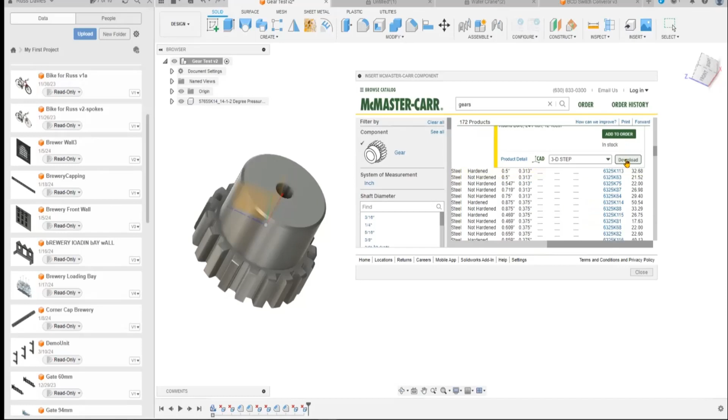Then you can go through and pick the parameters you want. I'll just click one at random to show you, then come down here, and you've got your CAD. Now I use the STEP ones, and they work with Fusion. You download it, and there it is. Let's just switch off my other one a minute - so that's the new one.

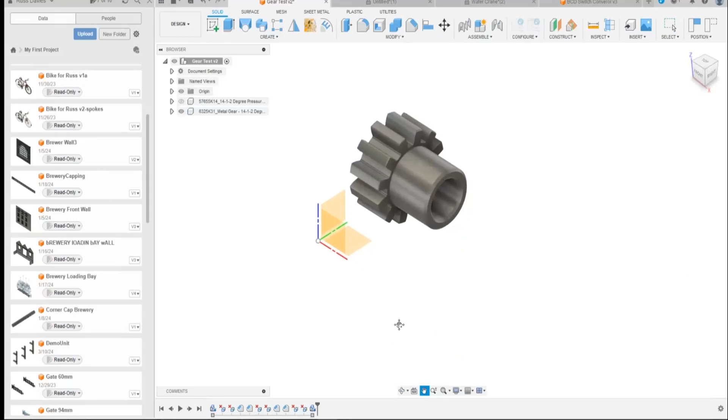We can move it about to where we want it and finalize it. Now, this suited me because it was the right diameter and right number of teeth, but I wanted a different size hole in it. So on the hole, we just highlight it, go into Push/Pull, and now we can see the actual size it is. I want to change that, say to one millimeter. I just type in 1 millimeter, and there's the new hole.

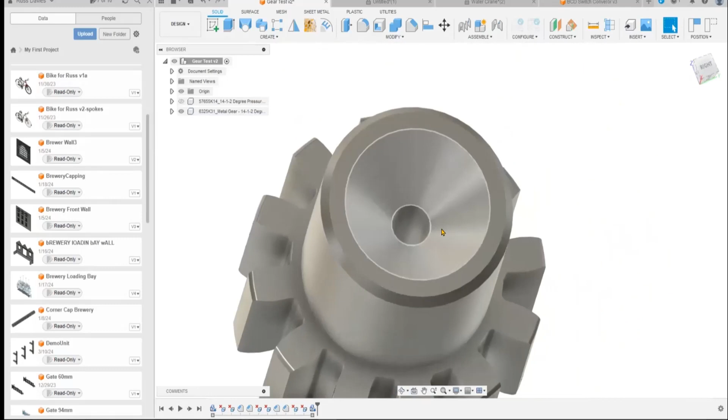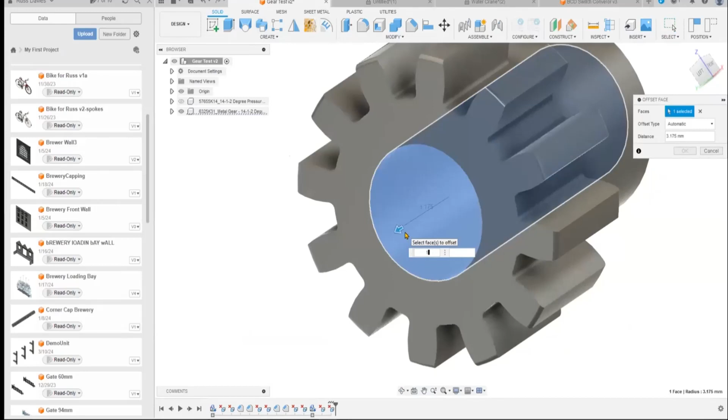Now it's extended this, so if we go back, you can edit. Let's get rid of that - delete it, delete the other one as well on the other side, delete, and then we'll just make our hole with Push/Pull, not Extrude - Extrude doesn't work on curves. Change it to the 1 millimeter we want, then we can come back and put our little chamfers back on.

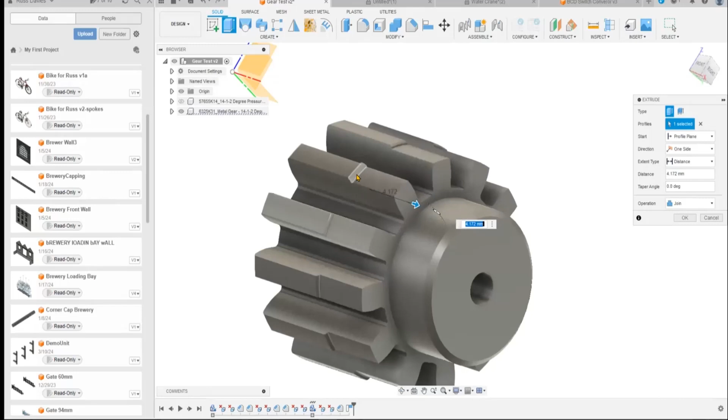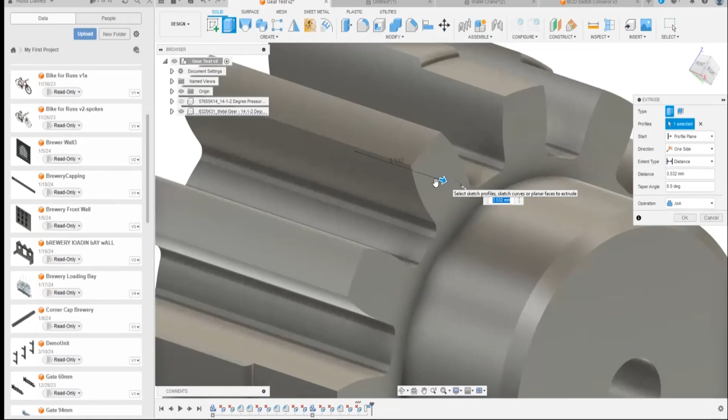And again, we want to make it a bit thicker maybe. We can highlight that edge there and extrude it, capture position, and bring it up there. Now you notice we've got a lip there - what you need to do is remove these curves first, otherwise you're extruding from there, not there. So you just highlight, delete, go around, then highlight it, extrude it, and then you can see, because we've taken them away, it's as easy as that.

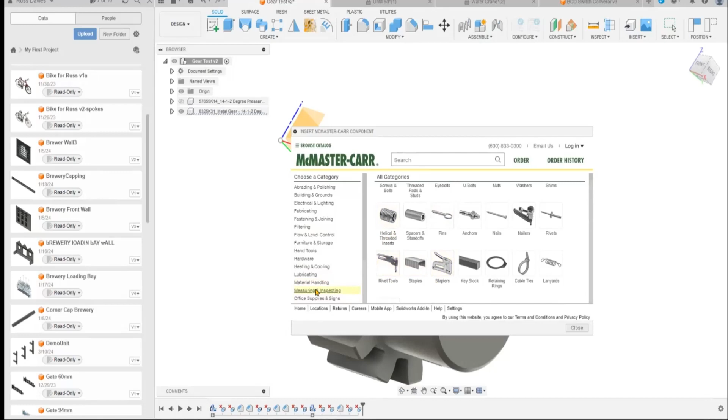Now that McMaster, if you look at it - let me run back to show you - you can see the sort of information you've got here. So you've got nuts and bolts. Not everything has a downloadable file - I don't think you'll find one for a Jubilee clip, for example. But when you're looking at nuts and bolts and these sort of things, it's great. Springs as well can be downloaded, and it can give you a good start, or you can use them as they are.

Can I just ask you a quick question on that? Don't go off that screen a sec, Russ. Sorry, I'm going to throw you under the bus. I apologize. What's that - could you change the diameter on one end of it? So that hole going through, instead of 1 mil all the way through, could you make it a tapered hole? Well, of course you could - now you're going to chuck me in the deep end, did you? Let's have a go, shall we? Let's get a shot of that first, right?

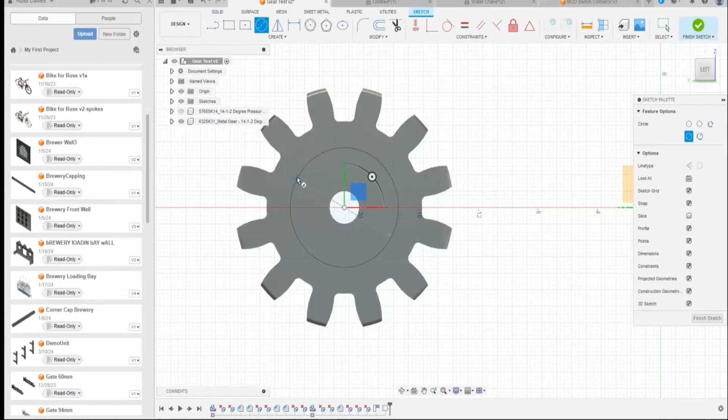So what we're going to do is a sketch on there, and we're going to sketch a hole there, okay, finish the sketch. We're then going to go to the other end, put a sketch on that end - and you know me, I don't like measuring things - so there's the other hole there, okay?

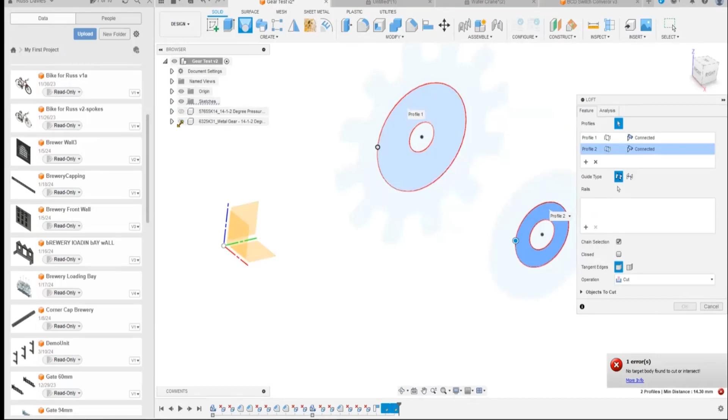Now what we're going to do is switch off the body so we can see what we're doing, and we're going to highlight both ends and do a loft, from there to there. We go down, we want to cut it, switch back on the body that we had - I think it's that one - and there's our tapered hole through the middle.

I've got these because, a little bit like Steve's done, I've got two projects on the go at the moment - one with level crossing gates and one with a turntable, except I'm using stepper motors, and I want to get a gear train.

So I've been looking at gears in this way, but you can see how you can actually get a standard gear. Within Fusion, there's no reason why you can't use the add-in, because you've got an add-in down here for spur gears, and then you can set it up yourself. I've used that, but obviously if you're downloading standard ones, it makes life a lot easier.

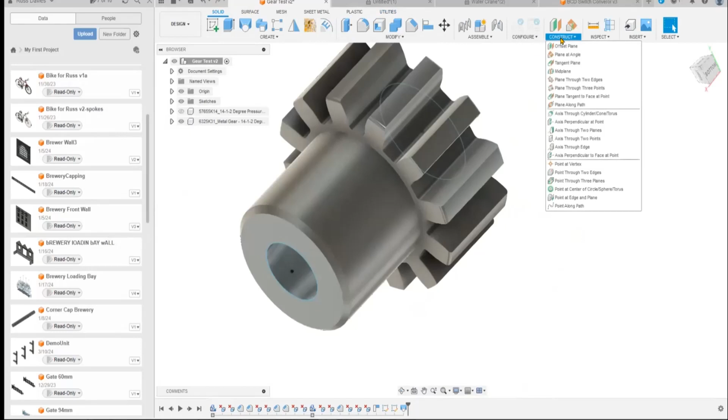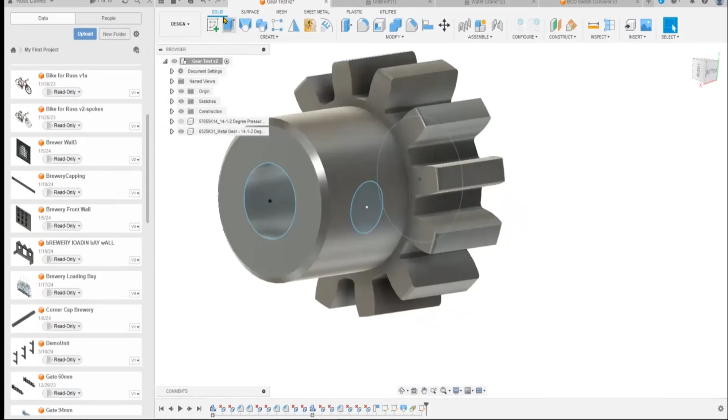And if you want to put a hole in here, the answer is to go back to your solid, construct a tangent plane onto there - there's our tangent plane, okay. Sketch on there - whoops, where's it gone? Again, I'm not measuring, you can do that for yourself. Then extrude it, highlight it, and then if you want to tap that for a grub screw, well, go ahead and tap it.